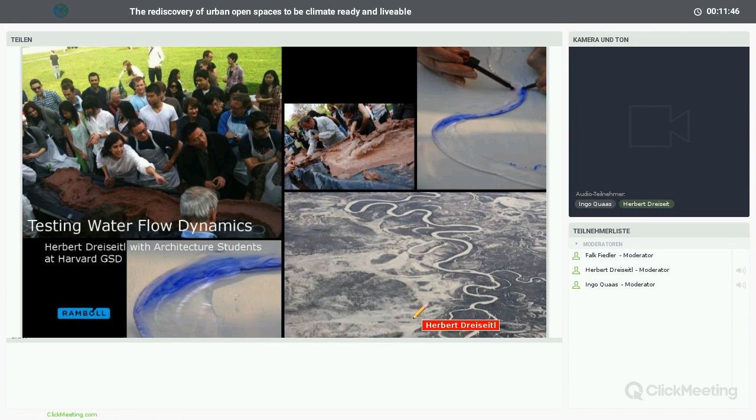When you look into the landscape before we get to solutions, we can also see that landscapes in general have a very resilient structure. Today in our cities, we have lost this intelligence of nature, and it's very interesting to adapt this kind of logic from the natural environment and bring it into our cities.

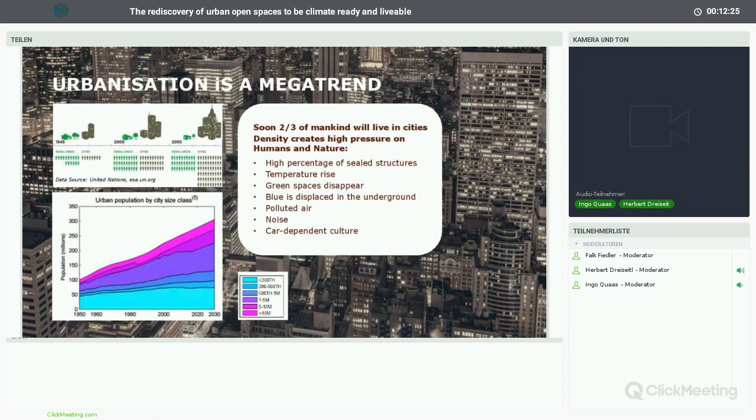The big challenge, as we know, is that more and more cities are getting denser, with more and more people living in them. So there is a conflict of space, a conflict of using this space in a very smart and clever way.

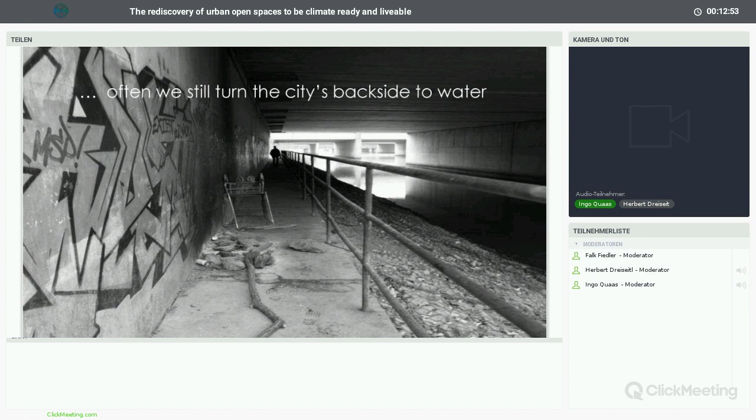Often the infrastructure, and of course the value of water and green space, gets pushed to the backside. It's seen as something nice to have, but if we don't have the space, we ignore it or push it aside. I know there is a totally different way we need to work, much more in partnership with the environment, even in our dense cities.

The logic is very clear. If we look at the water regime of a natural environment, there is a lot of evaporation, a lot of cooling effect. If we go to agriculture or the urban fabric, we find direct runoff and a lot of pollution going into rivers.

Especially here in the US, we have combined sewer overflows all the time. We bring pollution into our streams and rivers, and we actually lose a lot of fresh water. That is a real problem, a real dilemma.

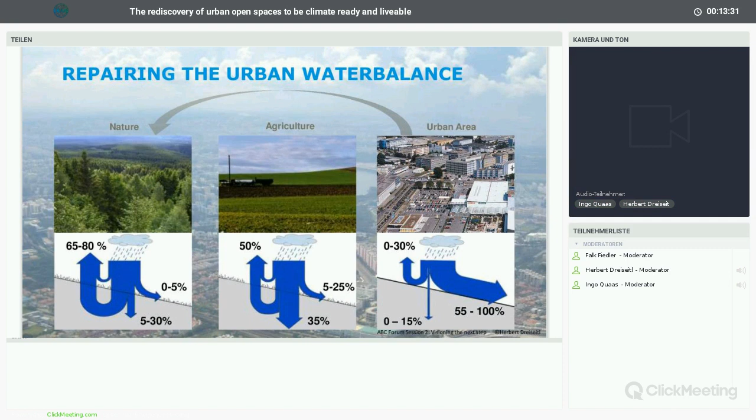If I may talk a bit about climate change, also from a US perspective: the average of all the research around the world is actually coming to the same conclusion.

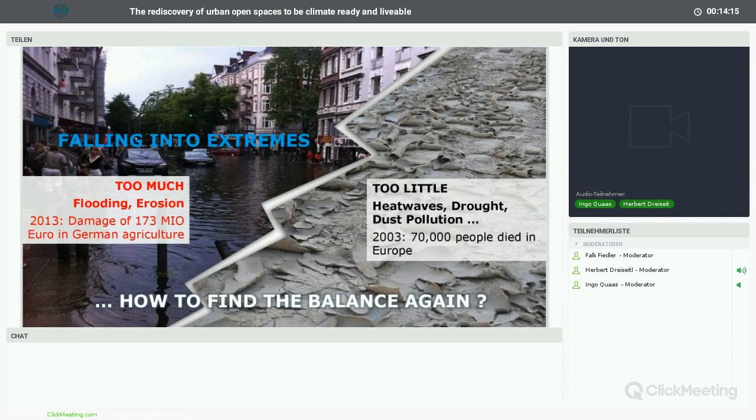Very often the average of rain is not so much different, but the intensity is changing. So we have, for example, on one spot an enormous amount of water coming down, and other parts with no drop at all. So we have to balance this much better. And I think this problem about going into the extreme in our cities is a very specific topic, which is also what people actually feel and experience in mega cities. And we have to find better solutions to that.

I'll just give you one example. In front of my own office in Boston, we had four extreme storm events in a row this year, and we had the highest water level ever measured in Boston. It was in front of my office that the streets, the ocean came so high that the front part was completely covered with seawater, and it was so cold that some of the cars were frozen in this ice water.

So the reality about climate change and also the extremes we have, this is not something for the future. This is something which is actually happening right now, and people can feel that. So we have to find much better solutions.

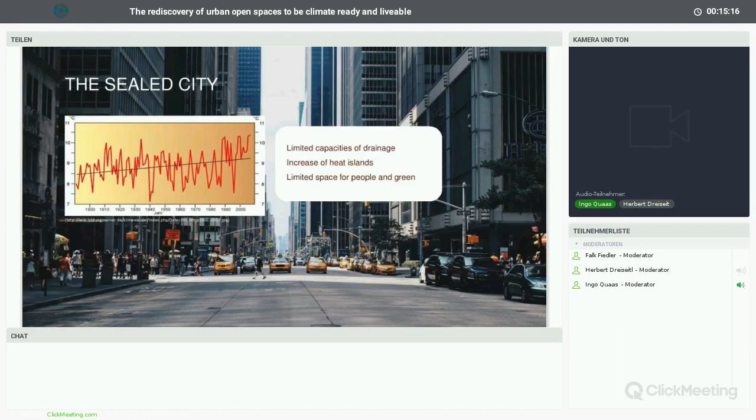A lot of challenges are not only about too much water, also too little. Heat extremes in the US, we have the problem that we have air pollution, we have noise pollution. There's lots of things which are all reasons to create more healthy cities and to integrate better the water system.

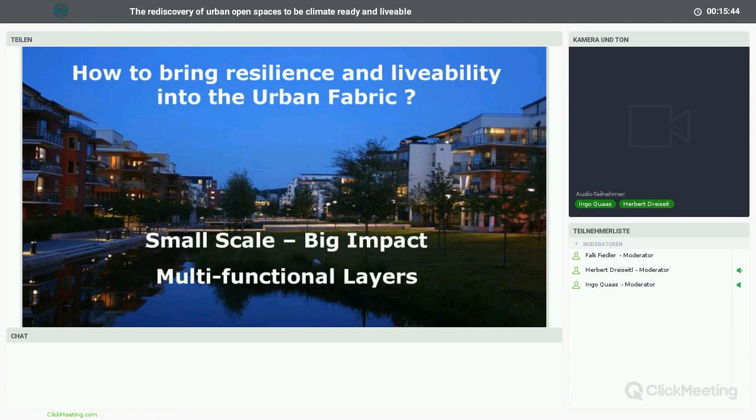I would like to give you some examples, maybe about our research and our attitude, how we work in this field. We're trying to find solutions on small and large scale. And actually what it is about is using any opportunity in a city, whether it's a little pocket park or a large infrastructure, or also streets, to be more adaptive, more resilient to what is happening and to balance the extremes.

For example, instead of using everything underneath in pipes, to use the city in itself, starting from the rooftops to the street scale, also very often small scale projects, to do the homework in front of our doorstep and not to put everything at the end of the pipe solution. So that is a very important part I think we have to come up with.

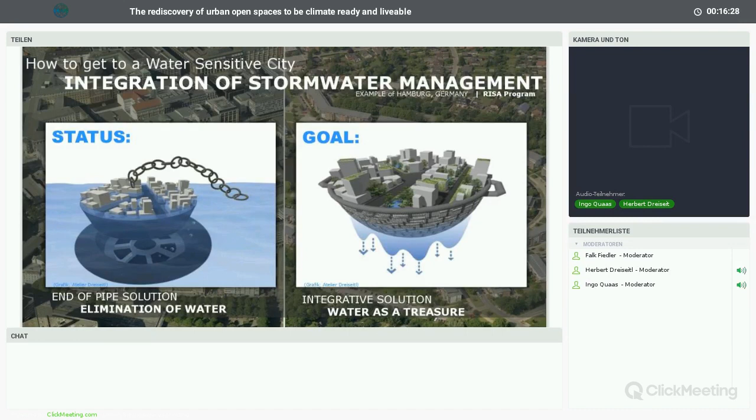And I just like to illustrate this very simply with some graphics. The traditional gray engineering is basically: we want to get rid of water, we want to bring it into pipes out of the city. We have a treatment maybe at the end if it's a combined or separated sewer system. And we use basically the city as a drainage system to get rid of water.

I think in the future, we have to get a more integrated approach, to decentralize our systems and to use the intelligence of nature and bring it actually back into our cities.

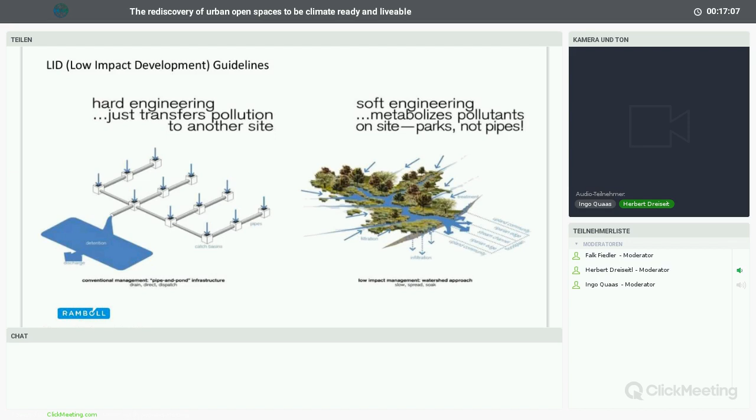Let me just explain that very simply with one example. I take Singapore here. I was very influential in Singapore for the ABC water guidelines, and our entire team was very intensely working for the last 10 years in the city. We came up with basically the guidelines for the entire city. What we are trying to do is collect every drop of rainwater in the city, bring it not only on the surface, but also treat it in different ways. We'll come to that, but collect it and also store it and recycle and reuse it.

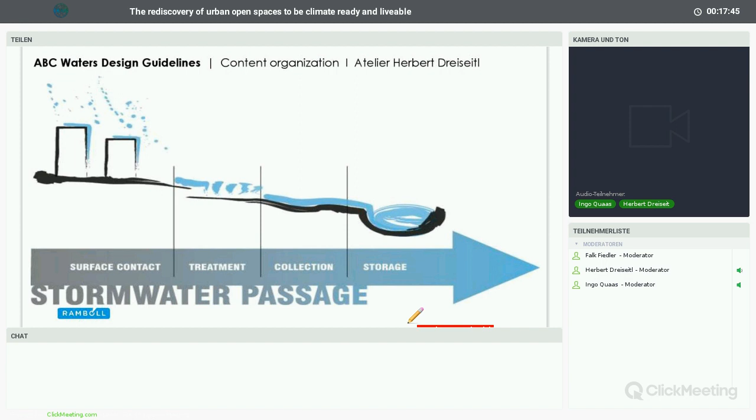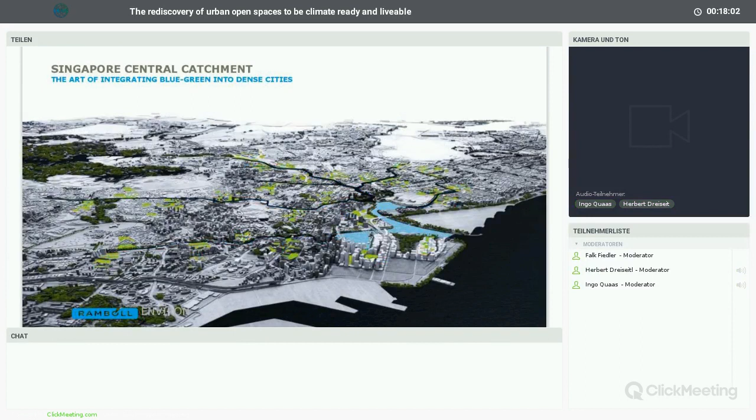Singapore is doing a big job to collect every drop of rainwater in the city and is using every drop in the city as a capacity to finally bring the water clean into a lagoon system, and from this lagoon system we use it even as a drinking water capacity. This is something which has to be done now on many different levels.

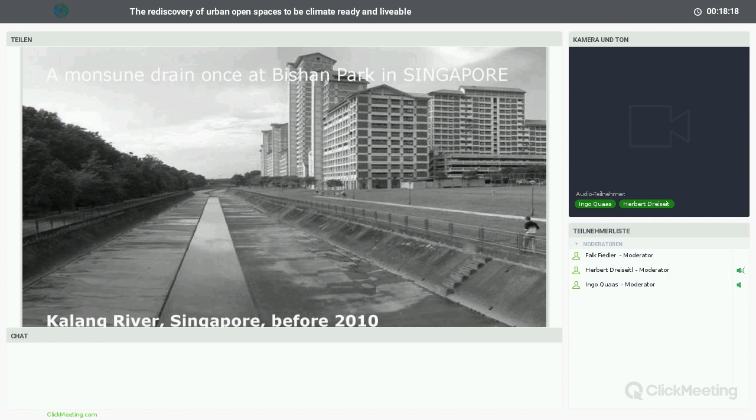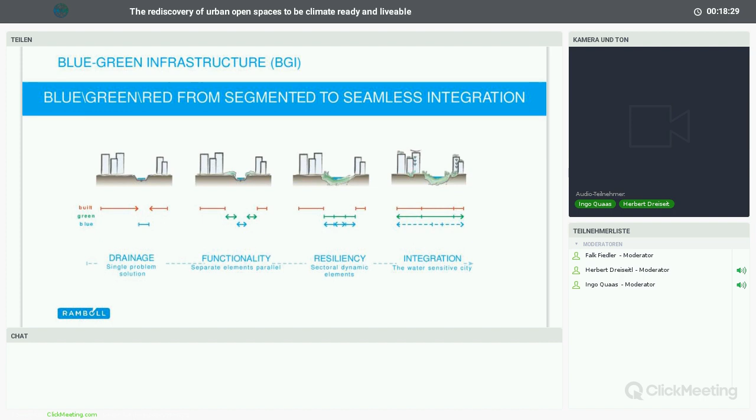The ABC water guidelines in Singapore start on reopening and changing canals and streams, and I would just like to mention a little bit about how we do that. Instead of having everything in drains to get rid of the water as quickly as possible, we have to get to a more integrated approach. And we have to find any opportunities, starting from daylighting forgotten streams, bringing them into the city in different ways.

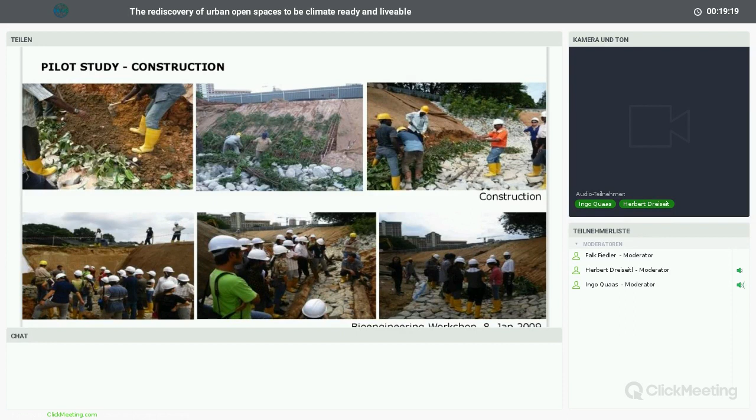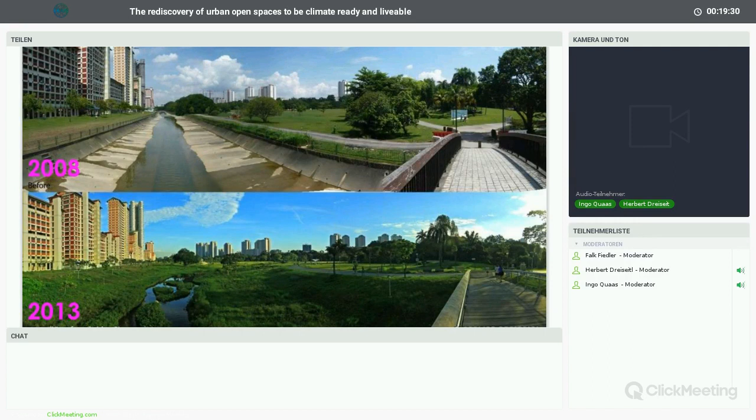And that means also that we have to create ways to really go from concrete gray solutions to a more integrated blue-green solution. In this case here in Singapore, we even start to use a lot of different parks and open spaces. We recycle material and reuse it, for example here. We bring bioengineering techniques, which we also use a lot in Germany for restoring streams instead of concrete, to use living material and plants to stabilize and avoid erosion. We are doing this on a large scale here in Singapore, and we actually change a lot of these infrastructure systems completely from gray to a more integrated blue-green infrastructure.

Well, this has many effects. On one side, we can hold back an enormous amount of water when it starts to rain. Singapore has monsoon rains which are unbelievable, nothing to compare to our normal big rain showers we have maybe in Germany. We have to capture this water in the city and slow it down. The side effect is also that the city gets much better from a climate, microclimate aspect.

I'll give you this example. A lot of people who grow up in cities, children, have very limited access to the natural environment. They live in air-conditioned, indoor systems. It's so important for them to understand how a natural environment works and how we can make our city more sustainable and livable. There are simple things, like the beauty of seeing a dragonfly or touching a frog. A lot of kids in modern cities are totally afraid of nature, and we have to create a better understanding and connection to that.

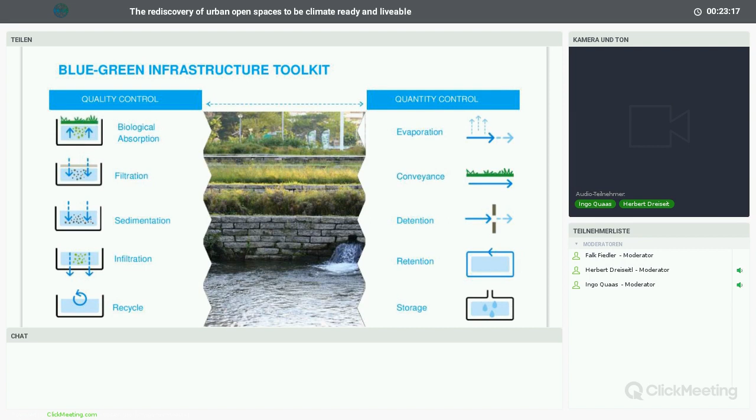A little more from an engineering point: there are lots of ways to work better with water and engineering solutions. There are always two sides of the coin: one is working with quality, one is working with quantity. We have many opportunities, not only in parks but also on buildings, to work more strategically and cleverly to bring together all the functions—filtration, sedimentation, conveyance, slowing down the process, and storing it. I'll give you one example.

You can start on buildings, and we've done that at large scale. I worked with Renzo Piano on Potsdamer Platz in Berlin. What most people don't know is that this was the largest project at the time in the world for an integrated stormwater and rainwater management system in a city. At Potsdamer Platz we have more than 50% green roofs, extensive green roofs, where we start to filter water. From there we bring the water into cisterns, and we recycle it for toilet flushing, shopping malls, and greenery.

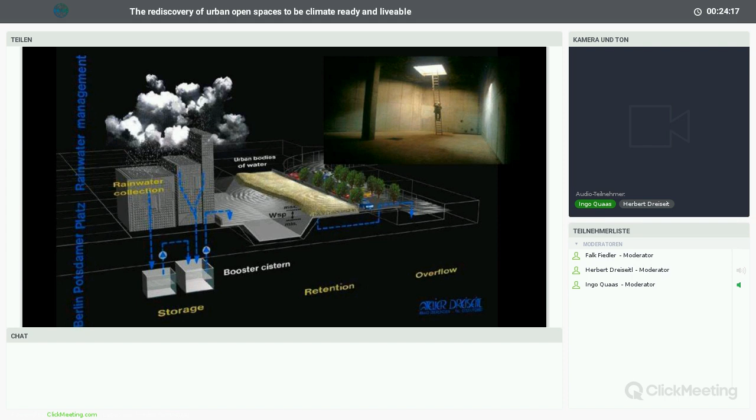The rest of the water goes into a lagoon system. The lagoon has flexible water levels: when there's a lot of rain, the water level goes up; in a dry period, it can go down. It's a very interesting and efficient way to handle, hold back, and use water more carefully, making more sense with the environment.

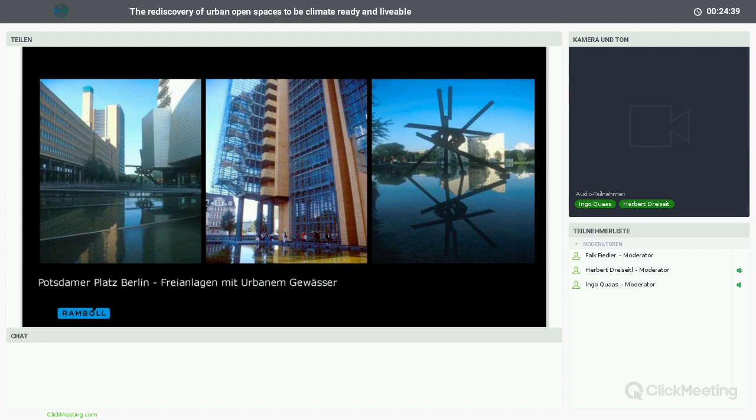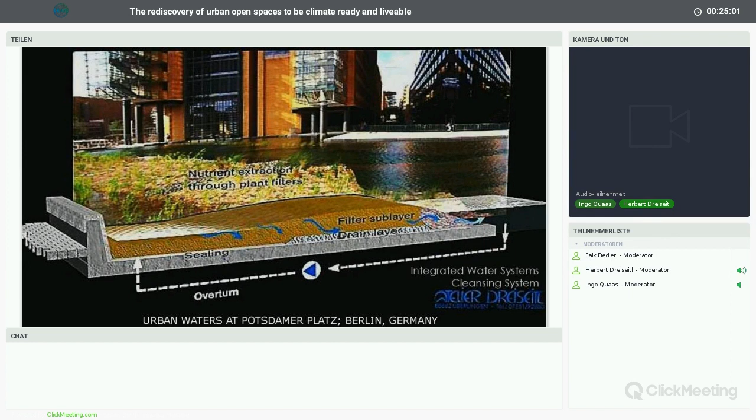Potsdamer Platz has, of course, a very extreme design solution—you can't do this everywhere. We have open lagoons, fed only by rainwater, with a special filtration system where we circulate the water in summertime. We don't put any chemicals into it; we use the natural filtration system of a cleansing biotope, where water is filtered through a substrate, and the plant material and root system, with microorganisms, do the job of cleaning the water.

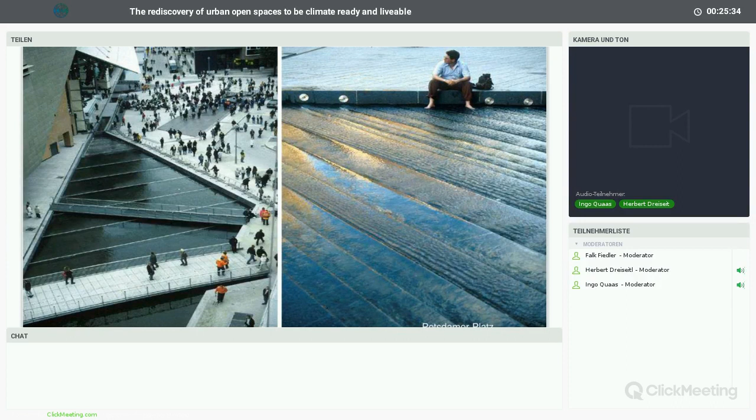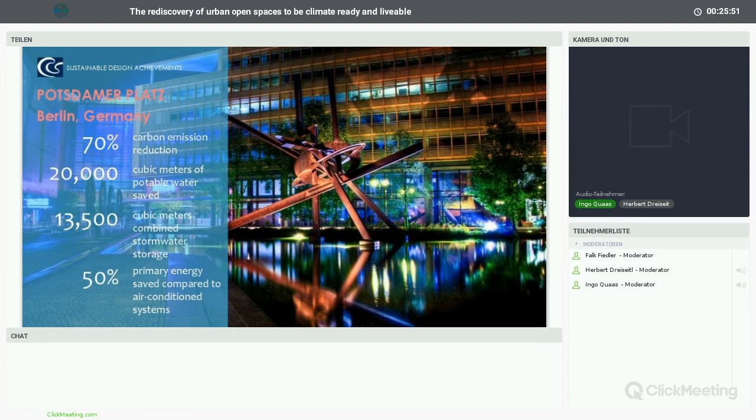This kind of integrated approach can also be beautiful, and that's a very important part. That's what we try around the world, including on brownfield solutions—not only to have technical solutions to solve a problem, but to turn the problem around and make it a solution that brings new possibilities into a city. You can do much better things, bringing beauty and engineering together, being smart about energy, combining recycling systems, and reducing the carbon footprint of our cities.

I'll give you one example here from Tanner Springs Park in Portland. That was also a pilot project. This was actually very much a brownfield site. Portland, a typical, very interesting city in the US, one of the most green cities in the US. They had a town center, the typical grid, and they had a big part of the city which was totally just industry, rails, shops, and so on.

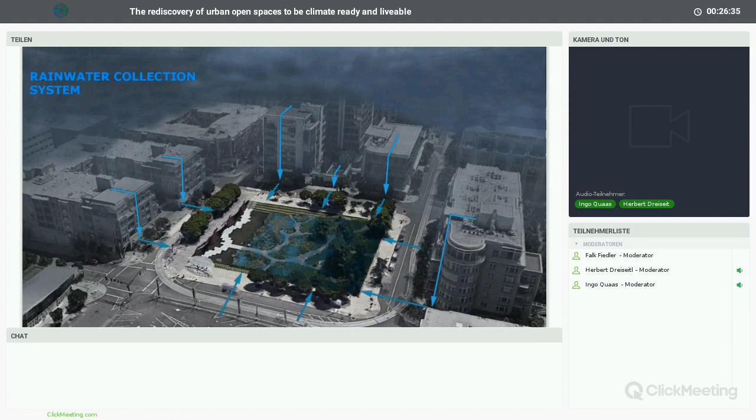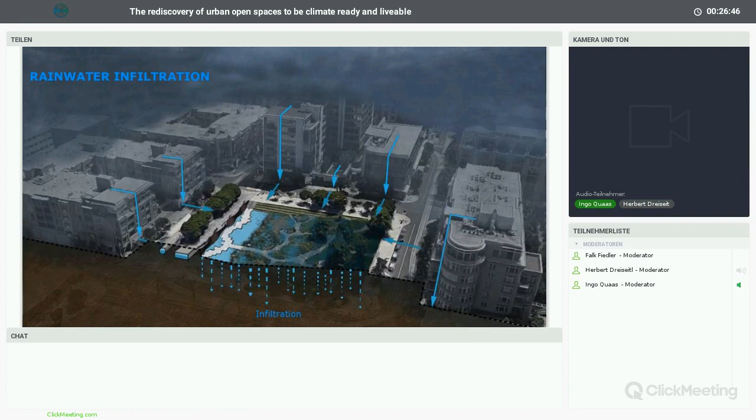We changed that Pearl District completely, and I'll give you one example of what we did. All the new buildings, and sometimes also recycling of old buildings, are collecting and capturing water, and we bring it into a public park. This public park has different functions, of course, evaporation and infiltration, and we can circulate the water in this park, and we bring finally totally clean water out.

If you involve people, and not just give a kind of nice show, but really let their voices, dreams, and visions come up in a discussion, and empower people to expose them to new ideas and also let them create new ideas, you will have a much better political background. That is very important for politicians to make decisions, and it's also very important for stakeholders to be involved and to finance such projects.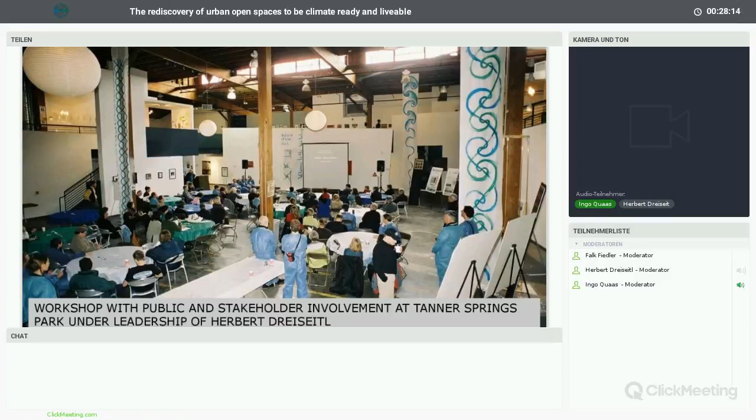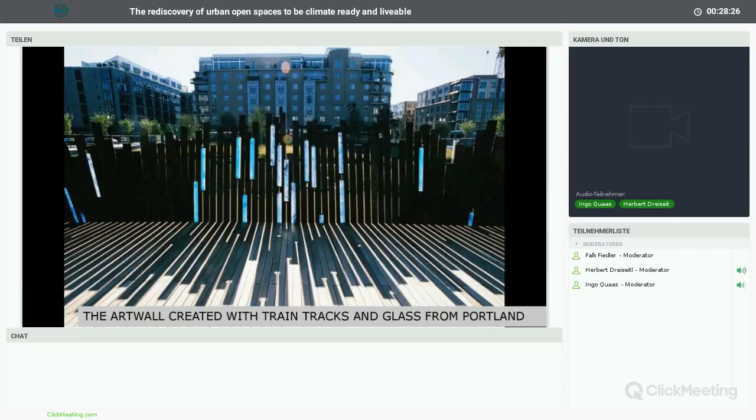There's a lot I could say about that, but I'd just like to mention that this project involved a lot of stakeholder and city involvement. We even recycled a lot of the material, including the old train tracks, into an art piece. People love this park. People have taken ownership of it.

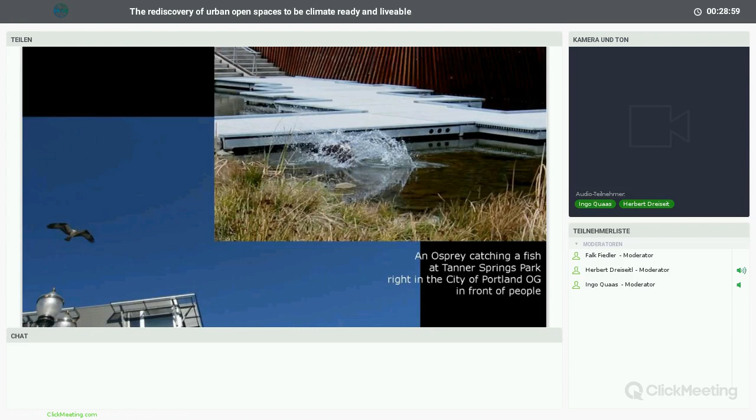It's interesting that there is a whole group of volunteers who started to clean up the park, so we have much less maintenance costs than other parks. Teachers use this for open classrooms, like clean, green classrooms outside. We can even find ospreys catching fish in this park. So it's a very interesting way of bringing a modern park and also nature back into the city. You can even see sometimes there are art performances on weekends. So it's a very dynamic and interesting integrated solution.

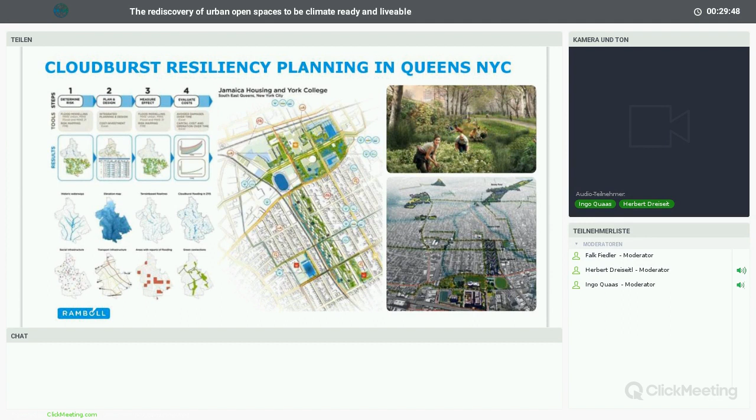Finally, maybe I'll give you a short intro about what we do with solutions based on cloudburst projects. We are working here in the US on much more integration of engineering solutions, like here where we're actually working for New York City, for Queens, to come up with integrated approaches. We do cost-benefit analysis. We work on the question: if a city would invest in green infrastructure, how can they save money in the future where they usually have problems otherwise?

We often do this in our teams here in the US with brownfield recycling projects in a very simple way. We make sketches, often on site with people, to show how things could look. This really gives a very interesting process, an integrated process also in the planning.

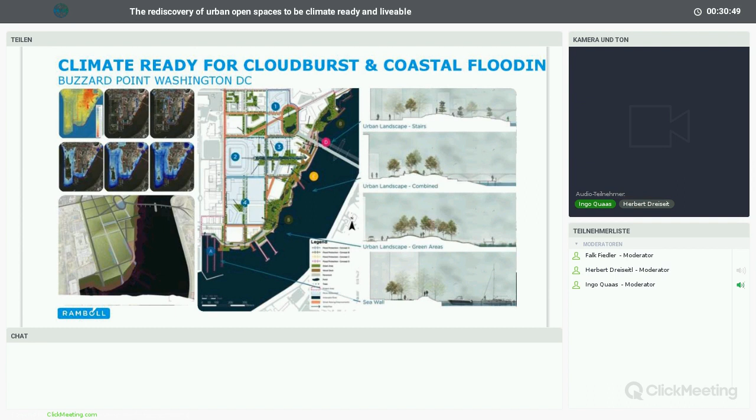We also work, for example, on resilient coastal solutions. This one is a project where we are working in Washington. Washington is very much in danger because sea level rise could flood a lot of the city. So we create a kind of living seawall, and we combine this with an integrated approach to stormwater management. This is a very interesting way to work.

What is important, especially here in the US, but I think also all around the world, is how to invest budgets in the most clever way. It is very expensive for cities in the future if they do nothing, and you can actually show and calculate that. If you invest in better infrastructure, you should do it now.

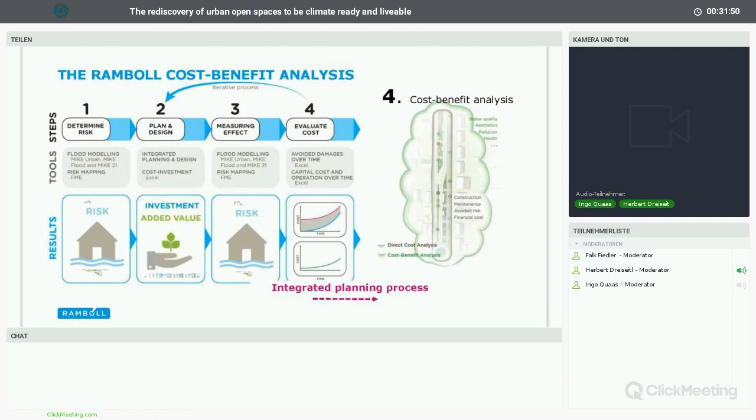What we also do with our cost-benefit analysis is really count the co-benefits, the added values that infrastructure can bring to cities. We encourage investors, who are usually not willing to invest in such things but who would get a lot of benefit. We look very much for public-private partnerships, for them to see where their value is and how wise it would be to invest at the right moment. That is a very successful way to work.

You can also show what would happen if you do nothing in the next years. Where would be the damage, the floodings? What would be if you invest in different solutions? And of course, you have to find the optimum.

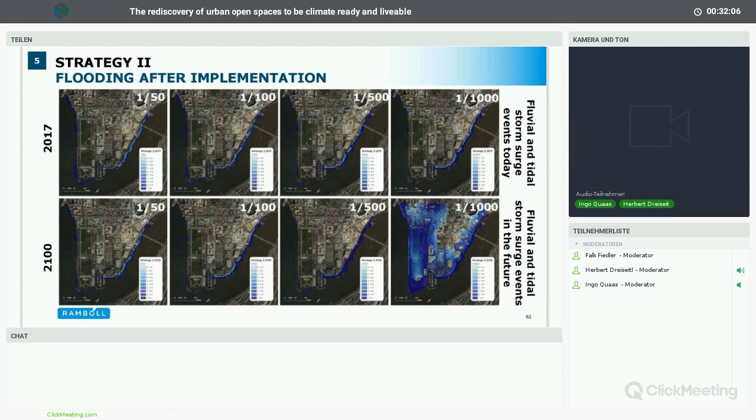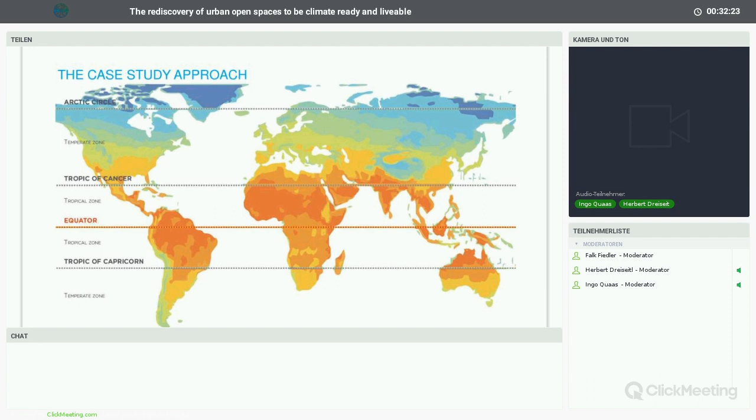That brings me to the last slides, let me talk a little about our research work. We are very strongly connected, and I'm personally doing a lot of research with my wife in the field of blue-green infrastructure around the world. We did research funded by the Ramboll Foundation, which is a very interesting way to work - we are owned by a foundation, so we can work in many different fields.

We compared European, American, and Asian solutions, and wanted to figure out: is there a difference in decision processes? What are the conditions to make projects work, and what are the constraining conditions that prevent projects from coming about? It was a very interesting result - we found that whatever regime you have, the problems and solutions look very, very similar in the different fields.

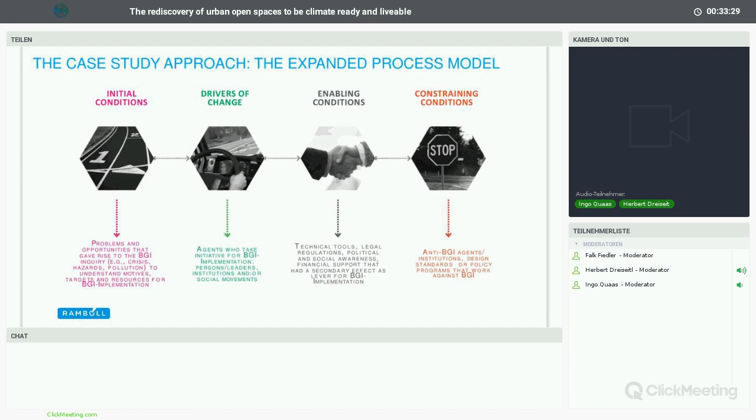I'll give you one example. We looked very much at the initial conditions and the constraining conditions. There's a very important part of that decision process - we usually only look at real estate development, but the real values of blue-green infrastructure are in many different fields.

This research work was done by Harvard GSD and MIT in Boston, then in Germany the Zeppelin University in Friedrichshafen, and my university where I'm professor, the National University of Singapore. So we brought real European, Asian, and American examples together.

We started with the different forms of capital building. It's very interesting in the discussion about investment in better infrastructure and brownfield recycling or development, that we have to look not only at the specific site and real estate development, at financial capital - we also have to look at the added value to human health, to built capital, to environmental topics, to social capital, and to symbolic capital. That is getting more and more important.

I'll give you one example. A lot of American cities are very run down - they have problems getting young people into the cities. So symbolic capital means the image of a city. The image is very much connected to good city planning, to open space, and to very good integrated solutions. Young people, when they grow up and have families, look for a healthy environment. They look for an attractive city which has culture, a very social network, and a very good environment. That is extremely interesting.

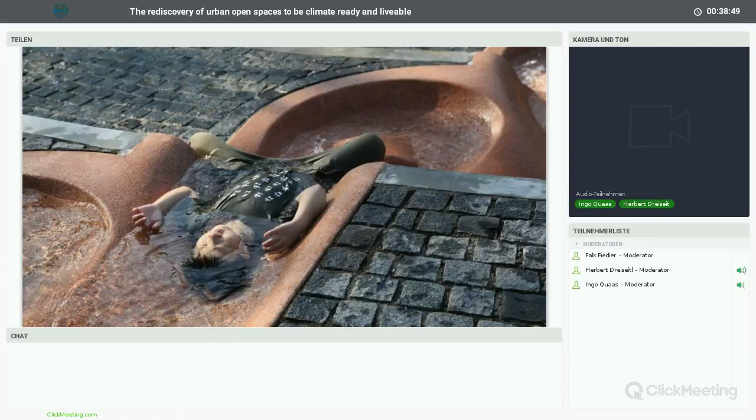In my project, I just show this as the last one here. I was so impressed about children in Singapore now in our new projects, how they play. This little boy putting his body into a little water stream experiences what it means if you can make retention or detention and hold water back, and he loves it and he did enjoy it. I have watched this little boy for at least half an hour, and I made some pictures, and it's really fascinating about that.

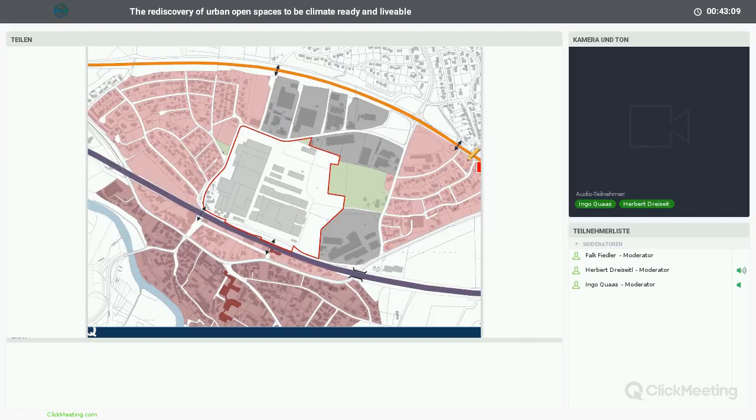One actual example from our own experience: I managed a competition for European town planners and landscape architects by order of a small community in Bavaria, for Mainleus near Kulmbach. Maybe someone knows the famous beer, Mönchshofbräu from Kulmbach. The subject was the area of a former spinning factory with a dimension of 14 hectares, located in the north of the small historic village near the river Weisser Main, surrounded by different dwelling and industrial areas, and also in the neighborhood a local sports center.

The task was to develop a long-time concept of revitalization of this brownfield as a new urban, or rather rural, area for living, working, and recreation, also taking into consideration the actual challenges of the Energiewende and climate change.

At last, 16 teams took part in this urban design competition. Last week, the session of the jury took place and decided who the prize winners are. There is a recognition award and three prizes. And there are two reasons why I chose this example.

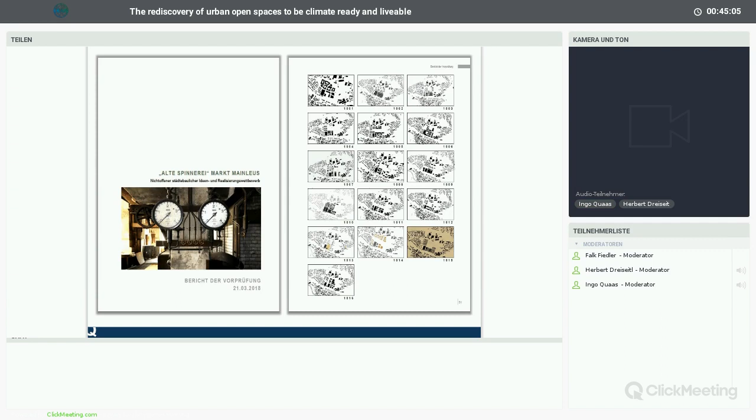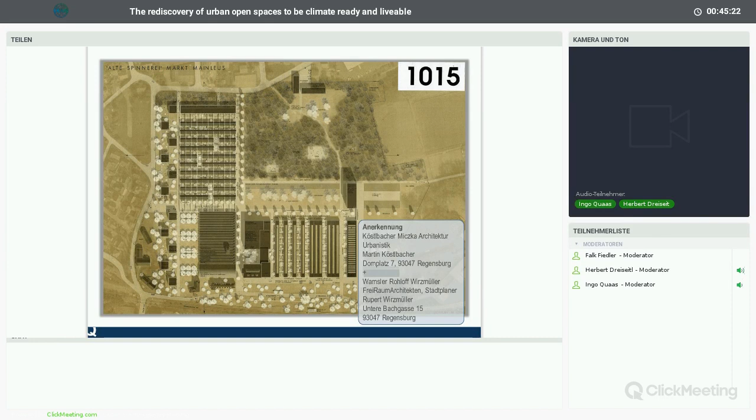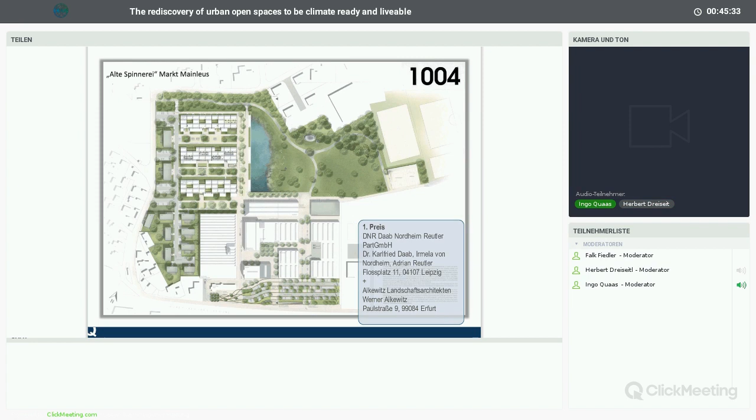The second reason is pleading for lively open spaces. If I show you the four prizes, the praise, the 3rd prize, the 2nd prize, and finally the 1st prize, it shows that lively open spaces matter also in small and medium towns. There's a steady demand for well-designed and variously usable open spaces, respective to the spirit of the place. And there's an increasing demand for climate-ready and livable open spaces also in small and medium towns. Because of the proposal of working places and the diversity of housing supply, the quality of open spaces in town, in the neighborhood, and also in the surrounding region becomes more and more important for people deciding where they will live.

At the same time, the question of economic efficiency becomes more and more important for communities who have to build and maintain public open spaces, especially given the challenges of climate change and, for example, storm and heavy rain, as shown before.

There's also another aspect, which I can show in this last example. From the point of view of the communities, not only the result at the end of a long-time development is important, but also the way to achieve this final stage. So in this competition we also ask for the phases necessary or possible to get, step by step, acceptable situations, especially for people who are able and willing to take first steps with investment or with leasing a dwelling house or a trading area. That's what I wanted to show with this example: the opportunity of competitions to find the best solutions, and also the best planners, for such a task in a small or medium town.